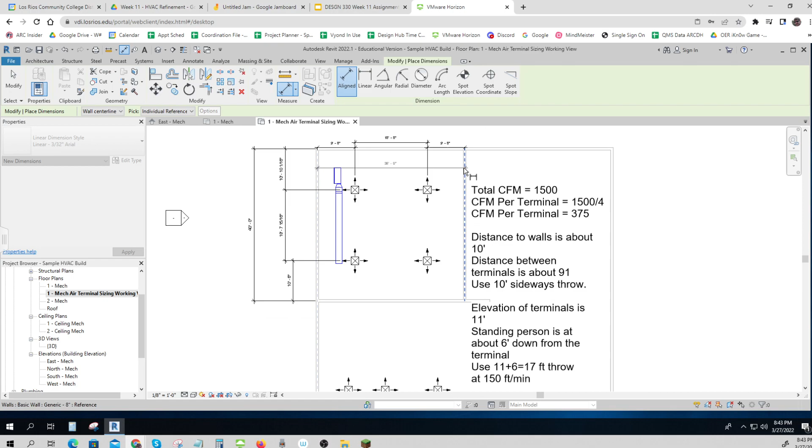So I just have kind of a squarish room. If I were to annotate that, it would be somewhere around 40 feet by 36 feet, just as an example. And I've got some stuff in here. I've got my HVAC air handler, and I have some ducting, and I put in my just standard little air terminals. Let me pick on an air terminal there. And it's my standard 24 by 24 with a 12-inch connection, and it's 11 feet up in the air.

And so I've done a little preliminary calculation. I'm going to pretend you would get this from your calculations, but I'm going to pretend that I need 1500 CFM. Okay, and you can get that from your total CFM for that space. Once you've got that total CFM for that space, you want to know how much each of these terminals is going to be. And so I've got that calculated out. But the main thing I need to do next is set these up so that it's pretty even in each direction.

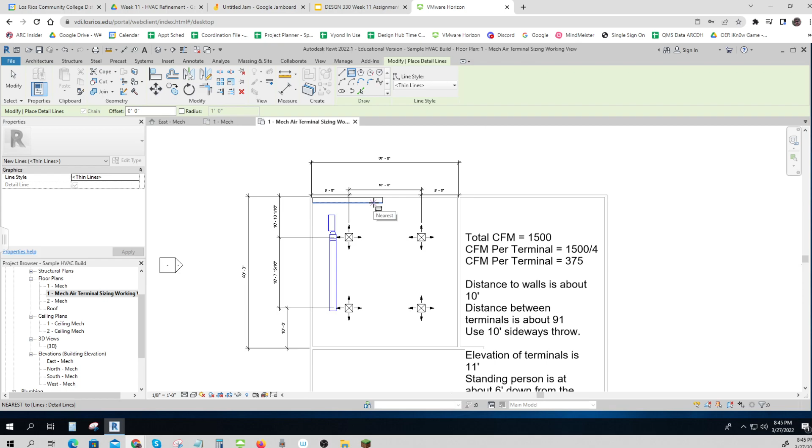Okay, so if I were to take a detail here, come about halfway out and about halfway down, it would be sort of like what area this air terminal will do. And air terminals blow air outwards and then down. And I'm going to refer you to this video. Okay, you sort of need to do this all at once and read this whole thing. Look at this performance data sheet and watch this video and move these things around. They just all kind of have to happen sort of at once. So read it and try it and then go back and do it again.

But you'll see that the air blows outward until it hits a wall or the air that's blowing from another terminal. Once they hit each other, they sort of mix and blow downwards. So the air comes out and then hits the wall and goes down, and goes out and hits the wall and goes down. And that's called the mixing zone. Okay, and we want that to be somewhat even.

So here, and it's just air, so we don't, but this is almost 10 feet. This is a little more than 10 feet. Halfway to this one is almost 10 feet. Almost 10 feet, almost 10 feet. So I've got these things spaced kind of like 9, 10, or 11 feet apart. So I want to even these out as much as I can and then find out what this number is.

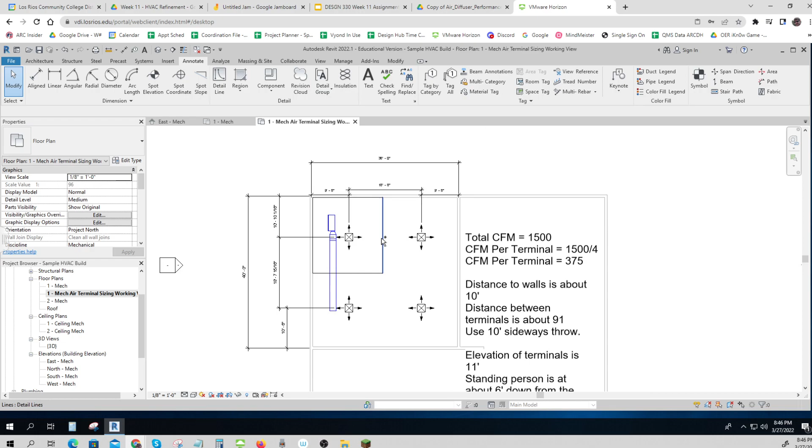That's your sideways throw. And remember, in between, the throw goes halfway to the other terminal. Over to the wall, it goes all the way to the wall and hits down. Between terminals, it goes halfway to the terminal, and then that air mixes down. Okay, so that's my first step. Get these kind of even. You just got to put some dimensions on and play around.

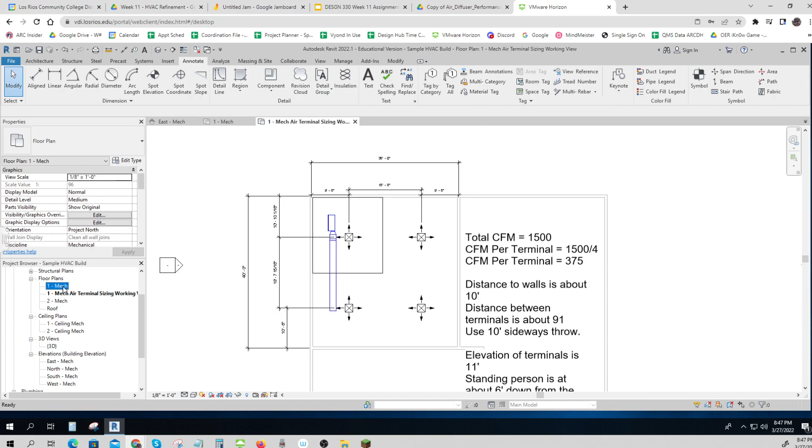Now, how did I do that? I took my 1 mech, which was my real drawing, and I made a duplicate of it. I duplicated that view, and I'm just going to use it. It's called a working view. If I move something around or whatever, it's got to move around. It's not just a drafting view. It's a working view, and this is really common in air conditioning and structural and the like.

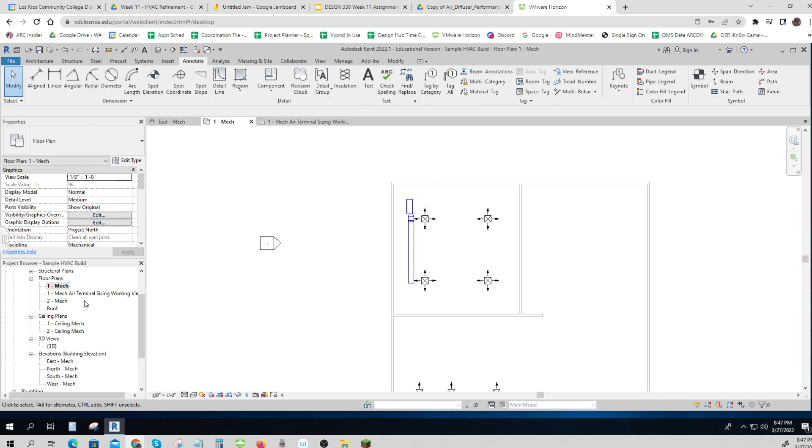So I've got my working view. Now this one isn't going to show up on a sheet. It's just where I put a bunch of dimensions so I can see what I did. And I can make sure everything is sort of near 9 to 10 feet apart. Okay, so the distance to the wall is about 10 feet. The distance between the terminals is about 9 feet, 9 feet.

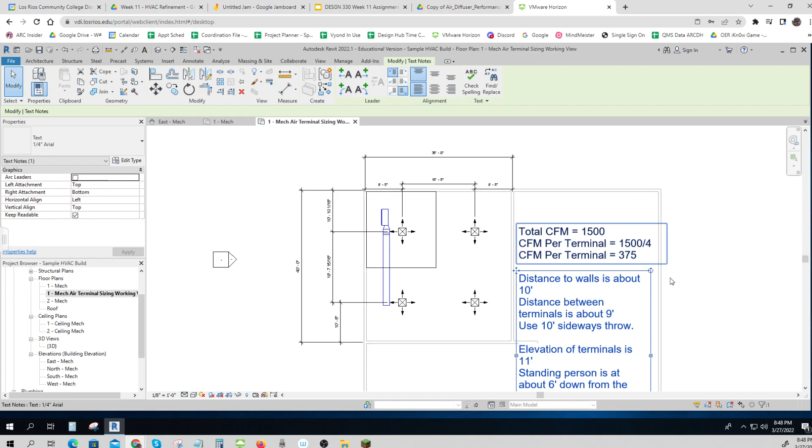So I'm going to do something called using 10-foot sideways throw. The air is going to blow sideways out of this terminal 10 feet. And then I have to figure out how far it's going to go down. See what I'm doing here? I'm sizing each of these. I've got a video that shows you exactly how to do this. But the first thing you have to do is get them all kind of even.

Then I have to figure out my throw. And there's two parts of that. There's sideways and down. And you have to add those together. I'm going to resize this a bit. Oh, that was too small. I'm going to resize this thing so everything fits for you. There you go.

So sideways and down. Sideways is about 10 feet. Now, how far is it going to go down? It has to go down so it gets to somebody's head or shoulders. Okay. And this is at 11 feet tall. And people are around 5, 6 feet. So it's going to have to go down about 5 or 6 feet to get down to like a 5-foot tall shoulder.

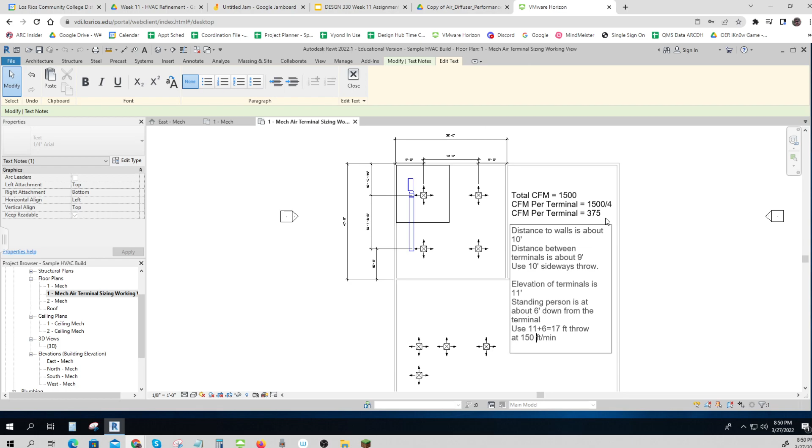Okay, so a standing person is down 6 feet from the terminal. And it goes outward 11, down 6. So my throw is going to be 11 plus 6. How far sideways, how far down? I'm going to have 17 feet of throw at 150 feet per minute. That's how fast the air is going to be blowing. And I need 375 cubic feet per minute of air to come out.

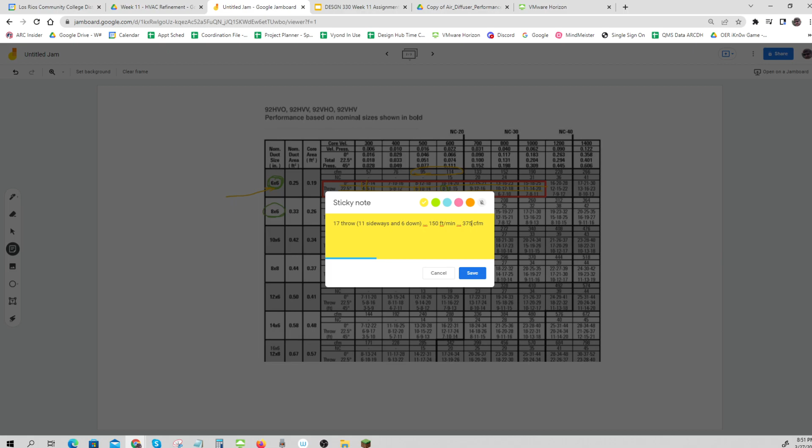I need to find just the right air terminal that does all three of those things at the same time. How do I do that? Okay, I'm going to go to my Jamboard here, and I'm going to duplicate this, I think. Okay, so this isn't what I want this time. I want 17 feet of throw, which is 11 sideways and 6 down at 150, and I want 375. Now, if you watch the video, okay, the CFM all along this top row.

This is an air terminal size, an air terminal size, an air terminal size. So I'm going to want one that's pretty big. I'm going to want one that's like 375. There's a 370. And let's see if I can find something pretty close. Okay, so I'm gonna highlight that one. I like 370. That one's kind of close. 384, that's not far off. 400 isn't too far off. So I might be able to pick one of these. 373, 410. Getting a little far away. Let's see if I can make one of these get close to what I want.

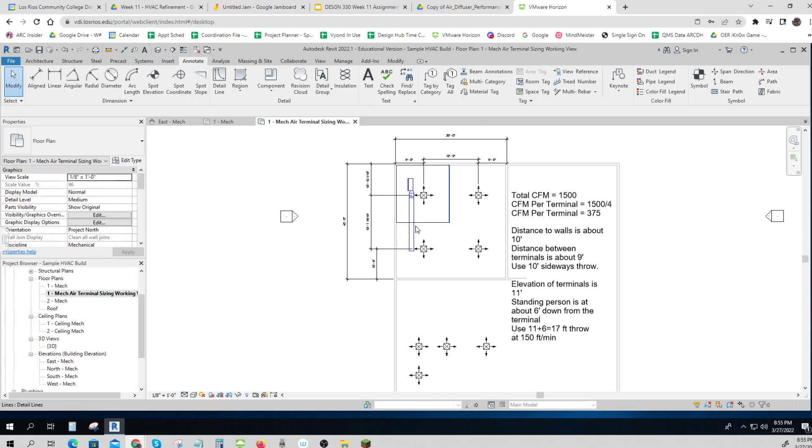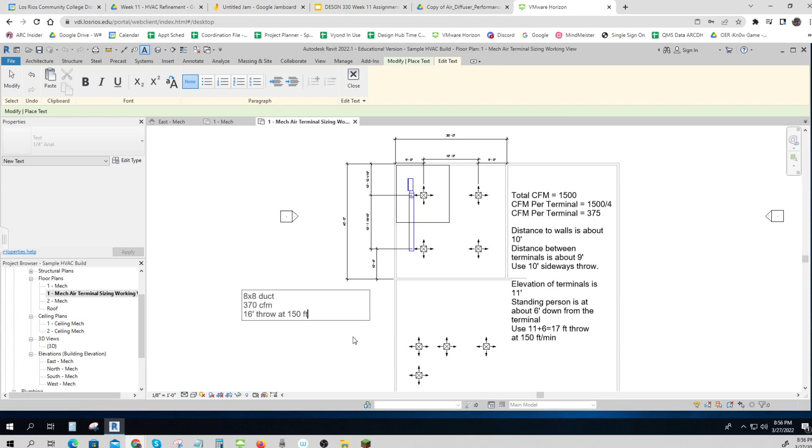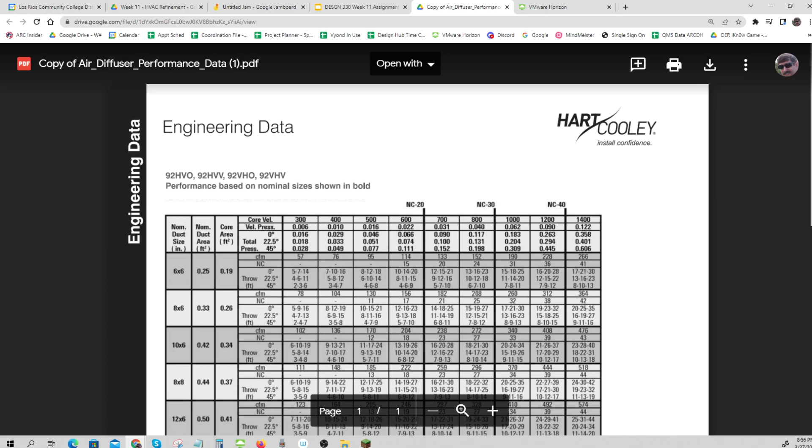And I'm going to write that down. I want an 8x8 duct. It's going to give me 370 cubic feet per minute. And it's going to give me 16 feet throw at 150 feet per minute. Now, how do I know which one that is? Okay. So this one tells me, right? I would circle that out and say, that's the one I want. Where is that? There it is.

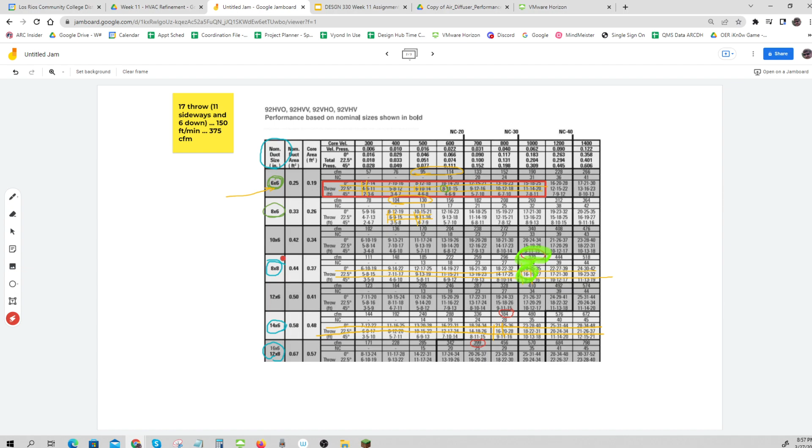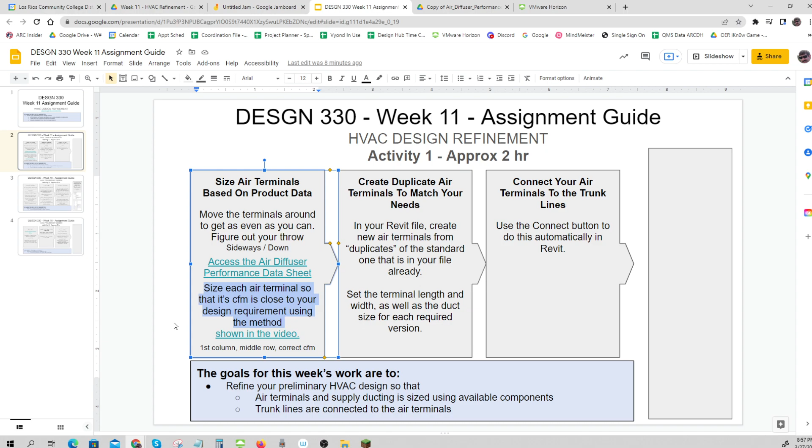Okay, so this is my performance data. So I'd want a 92 HVO, HVV, VHO, VHV. It's really a 92H or a 92V. And I want one with this ducting. And there's more data about it. This will do. Okay, so let's see what I did. I moved my air terminals around, figured out my throw, I accessed the air diffuser, and I sized each one that I need. Now you have to do that for all of them, right?

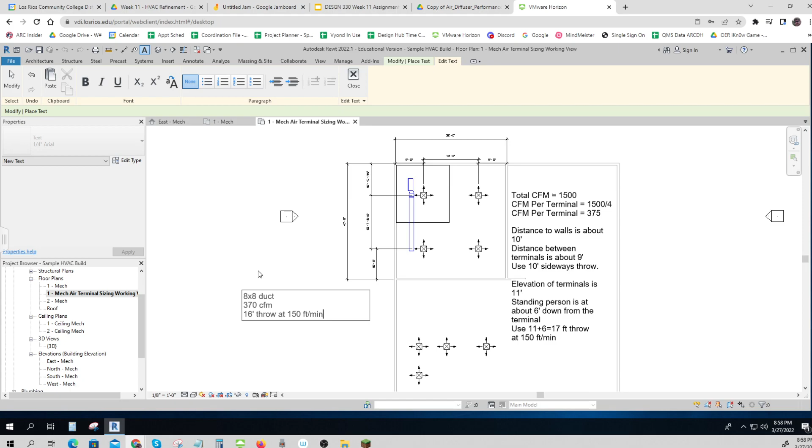You have to do those for each of the ones in these little rooms, these little spaces that you need. And you need to do it also for your lobby. And for each of your areas, you have to go through this whole process of getting these kind of close to what you want and getting the numbers and jiggling around to even it all up using that data to get to this data so that you can write it down on here. Okay, so that's your step number one. That's the hardest part about this whole thing.